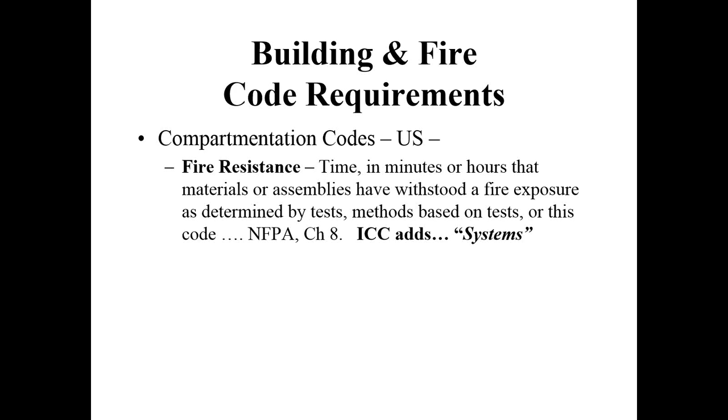Fire resistance is defined in the codes as the time in minutes or hours that materials or assemblies withstood a fire exposure, as determined by tests. Methods are based on tests or the code. When it says by the code, that's referring to Chapter 7 of the International Building Code, and also NFPA 101 as well as the 5000 code, where certain thicknesses of generic materials such as concrete will provide an hourly fire resistance rating based on a long history of testing that was done 100 years ago to determine the thickness of that system. That's used in various locations, especially in old buildings, to identify what the fire resistance rating was.

In an old building where you can't find drawings or specifications, another thing to do is check the back of the existing building code, find the equivalent rating for the type of material that's in it, and then maybe have a fire protection engineer determine what those hourly ratings are. A common function of all of these systems, regardless of the code, is continuity of that fire resistance rating.

Continuity is a concept that flows into the National Building Code of Canada, the Abu Dhabi National Building Code, the NFPA codes, and the I-Codes. Continuity of fire resistance is what creates the need for fire resistance rated doors, dampers, and firestopping in these fire rated assemblies. Openings and penetrations are protected, and the question is, what's the robustness? How strong are these assemblies, and what else can they withstand?

The international codes in certain occupancies have increased the amount of robustness for some of those walls. For instance, in super high-rise buildings, 420 feet and higher, the stairwells and the important shafts have a requirement for blast resistance. Check the International Building Code under that occupancy section, and you'll find where it's required to have blast resistance of those stairwells. Why? To resist some terrorist attack, some explosion that might occur in that building.

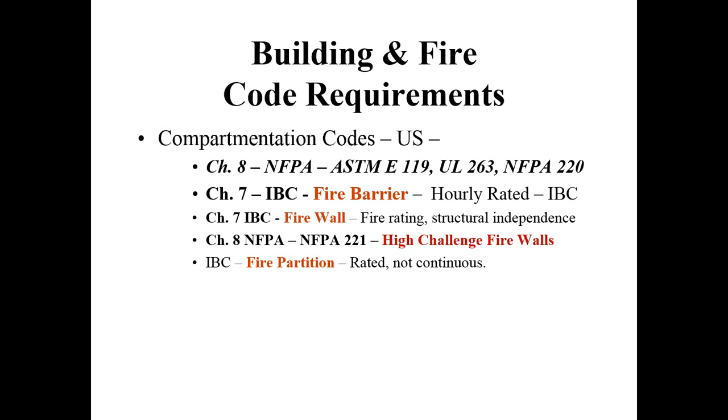That's a true test of compartmentation and structural capabilities of a wall that protects one side of a building from the other. In NFPA, you'll find in NFPA 221 high challenge firewalls. If you go over to the FM world, they'll probably call them maximum foreseeable loss walls. They're meant to protect operations that are critical from a fire that takes place on one side of the wall or the other. Fire partitions are also rated but not continuous.

Then you get into other types of barriers, whether they're fire barriers or smoke barriers. The fire barriers are probably the most common things that you'll find in a building for fire resistance rated construction, used for fire rated separations, mixed occupancies, incidental uses, exit enclosures, shaft enclosures. They're all over the place. And they're used to separate spaces for egress, to protect property from one place to another as required by code. And this is where the, quote, above code construction can take place.

The building code says that if the occupancy is basically the same, you know, I sit in an office building and the people next door to me have the same type of occupancy. They're using the building as an office. Some building owners may choose to be more competitive in their marketplace to put a fire barrier or a smoke barrier in between offices. They could do that.

Does that mean the general contractor doesn't have to build to a specification because they know the code is less than is required? No. The scope of work dictates what is required in a building. The architect and engineers communicate the minimum requirements, code requirements, through the construction documents. But the building owner manager could say every separation between the offices is a 1 hour rated construction that has an air leakage rating for the fire stopping of whatever the number is. They can do that if they want.

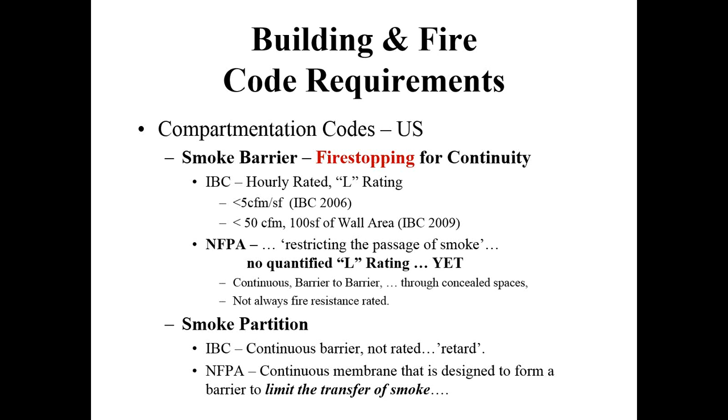Engineering judgment only comes after that contractor has looked at the whole universe to see if there's another system somewhere. How do you do that? It's easy. Call the manufacturers. They know each other's systems because it's a competitive world and they'll find it. Great question. Thank you. So we talked a little bit about requirements, code requirements.

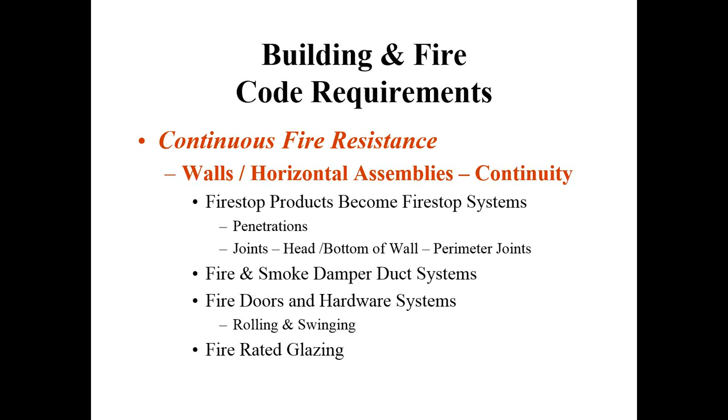There are fire-rated walls that occur all over the place. Exterior walls occur where the building may be too close to the building next door, and fire resistance rating is needed for that exterior wall. It's used in firewalls, fire barriers. These systems, these barriers are used throughout buildings, throughout the world. How's it made continuous? Yeah, firestopping is something that does it, but the other thing that does it is the fire-rated doors, dampers, hardware, glazing, all that kind of thing.

Somebody asked about nuclear power plants earlier on. Many of these products were designed for nuclear power plants. The firestop industry got its start actually in shipbuilding hundreds and thousands of years ago by building compartments that if they fill up with water or fire, they won't spread to another part of the ship and sink it. Nuclear power plants use the same type of protection to protect against radiation, explosions, fire, smoke from moving into critical areas in that nuclear power plant. So many of the firestop products have already been tested for radiation resistance.

Check with the manufacturer to know whether or not the radiation resistance meets the requirements for some of the key critical containment areas. In other parts of the plant, non-containment areas, firestop materials may be able to be used in firestop systems. Check the specifications, check the nuclear power plant requirements. I can't tell you that, I'm not a nuclear power plant designer. Check with those that are really intimate in that.

Blast strength needs to be checked. Chemical resistance needs to be checked with the manufacturers. And biological resistance needs to be checked with the manufacturers and the industrial hygienists as well. Effective compartmentation is important for all kinds of reasons. Smoke control is one reason. Airflow in buildings is another reason. Someday they're going to figure out that it helps with energy efficiency as well by compartmenting a building and controlling where that air goes.

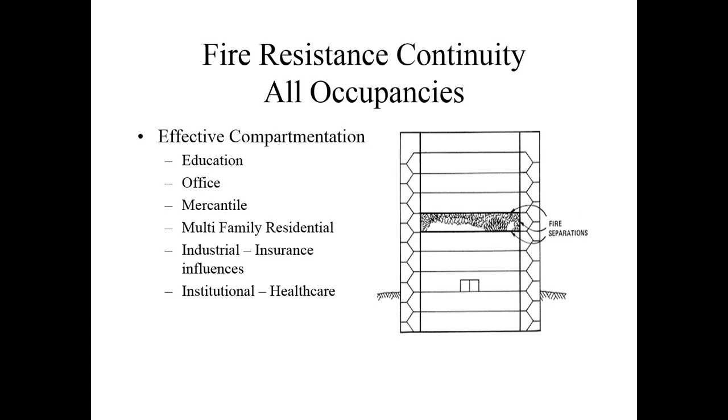But effective compartmentation is used in all kinds of occupancies. We've talked about this before. I'm just going to spend a very quick second on it. Fire resistance rated construction exists in a lot of different types of buildings. We constantly hear at the building code hearings, sprinklers are 99.99999% reliable, therefore buildings are safe. It's been our perspective as FCIA the buildings are safe for, yes, sprinklers, but for a lot of other reasons. The building officials that spend countless hours doing plan review, doing inspections, making sure that the building complies with code, huge.

But there's other reasons why buildings are safe. Alarms and detection systems notify people to get out and do something. The effective compartmentation in buildings keeps people safe. Looking at some statistics very quickly, in North America there's 11,000 tall buildings, 20 stories and higher. 70% of those buildings are in New York, San Francisco, Los Angeles, Chicago, Honolulu, and Toronto. If 70% of those buildings are in there, then the statistic that says that the sprinkler caused the safe building can't be completely true. Does it help? Absolutely. Does it increase the effectiveness of effective compartmentation? Yes. The numbers go up significantly when a compartmented building, a high fire resistance rated construction building, has sprinklers added to it.

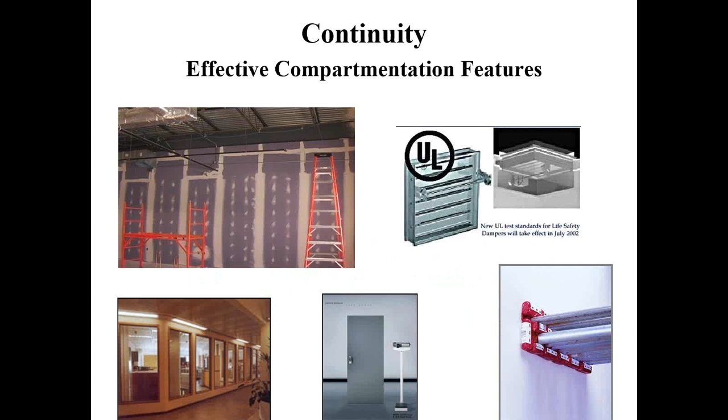The National Institute of Standards and Technology, NIST, mentioned in the World Trade Center 7 collapse, that's the building that fell down even though it didn't get hit by one of the jets, that improved compartmentation in tenant areas to limit the spread of fires could have helped on the structural collapse that took place. So in order to have fire stopping, we've got to have all these things built correctly. The fire-rated floors, the walls, the dampers, the fire stopping, all need to be built correctly.

Tested and listed systems is how we get this done. A professional person who looks at the plans and understands what those plans are. Then that person and the company have to select the appropriate firestop systems to make sure it works. And they've got to get it installed to the tested and listed system. This is where the rubber meets the road in the firestop industry.

The tested and listed systems are where most of the issues show up. For instance, take a look at this UL system right out of the UL directory. Many of the manufacturers publish these directly from the directories, whether it's UL's or FM Approvals, whatever it might be. This system, CAJ 1155, has been tested to both UL 1479 and then the Canadian standard ULC S115.

These two standards are basically the same. Fire resistance is the same, temperature rating is the same, how the hose stream is applied is the same. The only difference between these two is that in certain penetrating items, the pressure in the furnace in the Canadian standard, ULC S115, is higher than the US UL standard. My guess is the metal pipe industry wanted to make it a little harder for the plastic pipe industry to get in, so there's a higher pressure in the furnace.

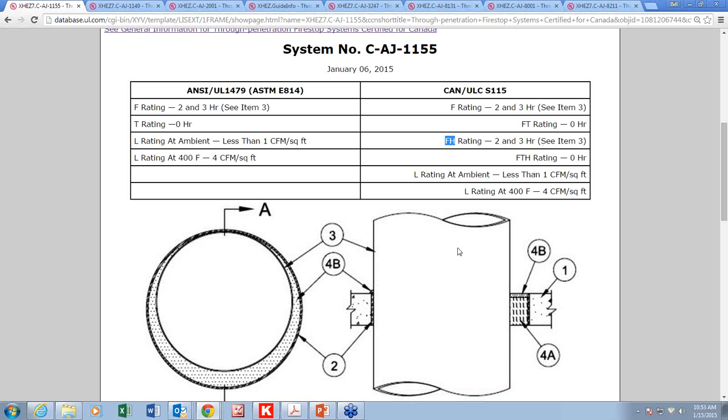Many of the manufacturers have tested both, and they've got systems for both. So as far as performance goes, you're able to find a wide array of systems for when that's required in plastic piping, usually in multifamily residential, around certain types of plastic pipes. Otherwise, everything's the same. Air leakage rating's the same, T rating's the same, F rating's the same. In Canada, the H rating, the hose stream test, is not mandatory all the time. In the U.S., it's mandatory all the time. Very few exceptions for the hose stream test in Canada, very few. It's a very important test to show robustness of those assemblies.

So we show up to the field and there's a plastic sleeve. Guess what? Got to go find another system. Doesn't mean somebody's got to tear out the firestop. It means they've got to find another system that makes sense for that particular application. Penetrating items are all listed in the system, and then the recipe to install the firestop is here as well. Question might come up, is this all I need if I'm the firestop contractor instructing my installers? Is this all I need to get firestopping installed? No, it's not. The manufacturer's installation instructions are critical to getting firestopping installed properly.

The firestop system only tells you what the requirements are and what the limitations are: annular space size, sealant thickness, what type of penetrating item, what type of sleeve it is, what type of floor or wall it is, and then what type of firestop product's in there and how thick. That's all described in the tested listed system. The physical properties, when you can install it, what you need to do to the product once it's in, are not explained in these tested listed systems.

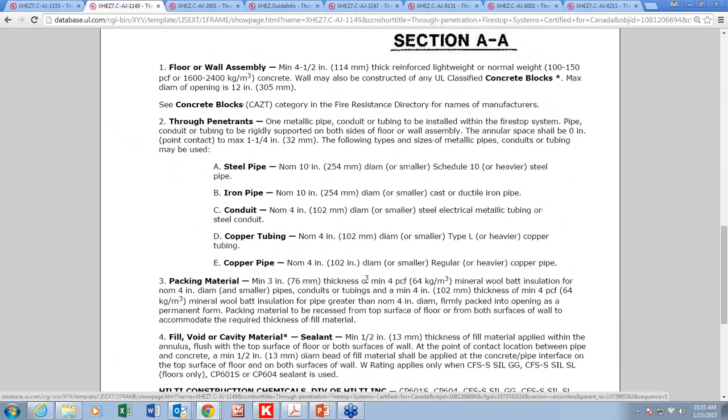Looking at another system, that one just happened to be a Hilti system. This system has no sleeve at all. If you scroll down and take a look, there's no sleeve described whatsoever in here. It just describes a metal pipe through a concrete floor that can be offset with a certain annular space, 4.5-inch thick floor, or any UL classified concrete block. All of this is described in the tested and listed system.

But if you notice, there's no sleeve. Sleeves are used in floors by mechanical and plumbing engineers to prevent water from going from floor to floor. They're everywhere. If you go in any high-rise building, you'll find sleeves in floors to protect those areas. The other thing you'll find typically is that the sleeve extends 2 or 3 inches above the floor. Why? Because that sets up a water dam to keep the water from dumping down to the floor below.

Take a look at this sleeve. It shows the sleeve flush with the floor. I'm only showing it because it's an example of what may not occur in the field. The fire stop contractor knows to look for a tested and listed system that has a sleeve that extends 2 inches, 4 inches above the floor, 10 inches past the wall, whatever it might be, that can be physically installed in that area.

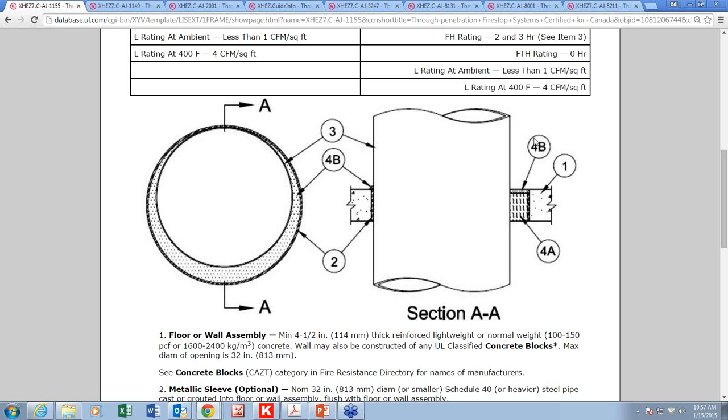If you think about it, if the sleeve was sticking up 4 inches above the floor and the fire stop is supposed to be, as it shows here, that the fire stop material is flush with the top of the sleeve for floors, both ends of the sleeve for walls. So top end of the sleeve, flush with top end of the sleeve. Look at what it says for the sleeve. The sleeve has to be flush with the wall or floor assembly. So if this sleeve is extending 4 inches past the wall or floor, it's a violation. We've got to go find another system.

That's a big problem if the contractor didn't know it and went and installed thousands of these and then has to go find another system that makes sense for it. Many of the manufacturers, you never say all in anything, many of the manufacturers have already tested for those goofy situations that I just mentioned. Are they goofy? No. They're common conditions that happen every day in buildings that are built throughout the world.

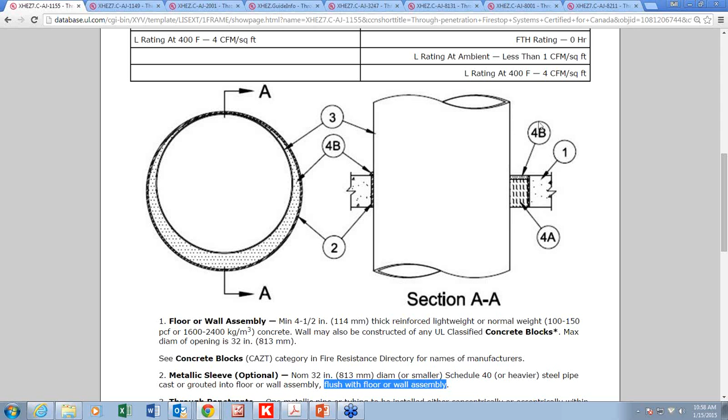Do these sleeves change from metal to plastic? They do, especially in cable type situations, because when pulling cables, you don't want to break the jacketing of the cable on sharp edges of sleeves. Looking at another system, this is the oldest plastic pipe system there is, CAJ 2001. It happens to be a 3M system. Take a look at this. It's got all the different ratings. L rating of 7 at ambient and 1 at 400.

What happens when in a smoke barrier? To count up for the 50 CFM per 100 square feet of wall area, we'd have to use the 7 CFM as the number. Why? Because in the building code it says, I'm sorry, it says ambient and 400 degrees. My apologies. So it says ambient and 400 degrees. So we've got to measure at the worst case, 7 CFM per square foot of opening area.

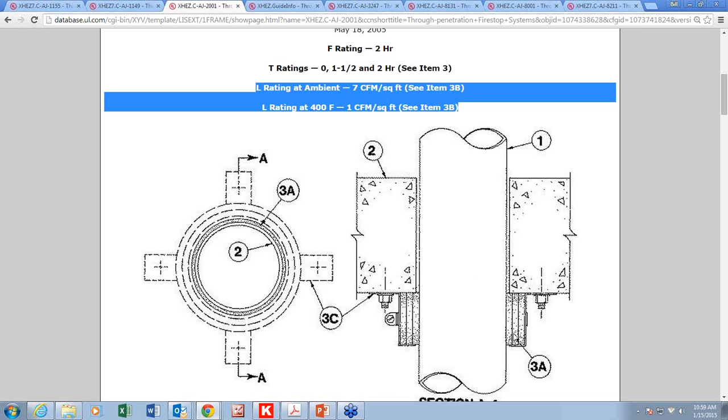And then take a look at this plastic penetrating item. Annular space is engineered to be pretty small. 3 wrap strips are installed. Likely it's a 4-inch plastic pipe. A collar has been installed. The collar is there to hold the intumescent wrap strip, which is supposed to expand at the same rate that the pipe is melting, and crush the pipe, forming an insulating char inside this area that will stay fire resistant for a period of time, 1-2 hours. 2 hours is what's called for here in this assembly.

Note that the collar is bent at 90-degree angles. It'll say it in the description later on that all of these things have to be 90-degree angles. So as an inspector, if you show up and it's at a 45-degree angle, it's a reject. Does that mean that the contractor has to remove it? No. They have to find a way to get that tab to be bent at 90 degrees.

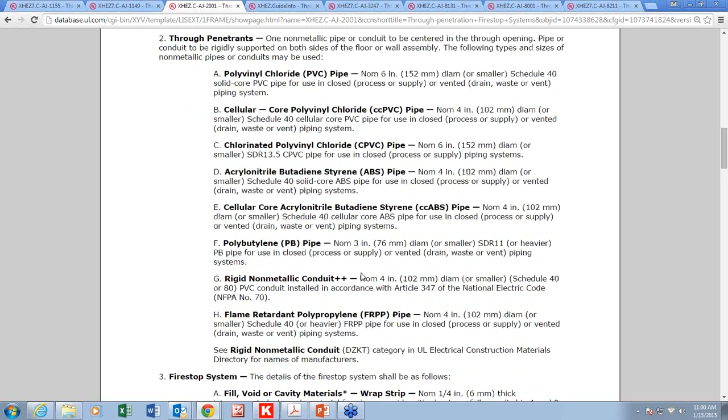Fasteners are fastened into the wall or the floor. In this case, it's concrete floor using steel fasteners. In a gypsum wall, it would be something different. It would be a toggle bolt of some kind with a fender washer on it specified in the system. And then I'm not going to read this system, but take a look how long this thing is. It talks about all the penetrating items. It talks about the fire stop system, and then has a table about what types of materials and how many of them are to be used.

Moving forward, it talks about what material it is, what the manufacturer is, what kind of caulk or putty is there. And then take a look at this. Under Section B, there's some caulk, sealant or putty that's not been shown. That's supposed to be applied to the outer perimeter of the wrap strip at its interface with the wall or the floor surface. Somebody that doesn't read the designs and only looks at the drawings would miss that.

So no, you don't have to be a lawyer to do fire stop systems, nor an engineer, but somebody has to be very clear about the installation instructions that are given to the workforce to get these things installed to the tested and listed systems. Without it, it's craziness.

Question came up. This UL assembly shows the fire stop collar installed at the bottom of the concrete floor instead of the top. It's a critical point. Fire is supposed to heat up these intumescent wrap strips. It's the heat that makes the intumescent wrap strip activate. If the fire stop were located at the top of the floor, this penetrating item would have to melt. That takes 7 to 10 minutes.

And then the fire would have to get hot enough above the floor to activate the intumescent wrap strip and make it crush the pipe. Probably not going to happen. Not probably, it won't happen. Why? Otherwise, we'd have a tested system that shows the fire stop on top. In this type of application, that does not exist. We've not seen that in any of the systems.

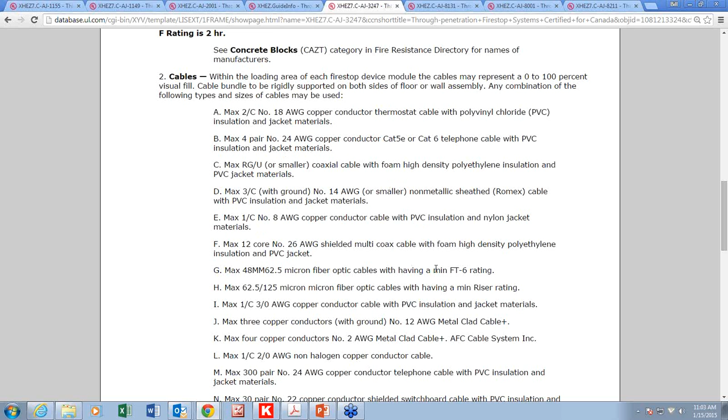Moving on to other types of assemblies. This one is the open path devices. This one happens to be from Specified Technologies with 3 different open path devices ganged together. It looks pretty easy, but again, we'll look at this assembly. It's going to have certain types of cables that are able to penetrate the assembly. These types have to match in the field exactly, such that if there were a copper pipe going through there rather than a cable, it'd be a reject because that's not part of the system.

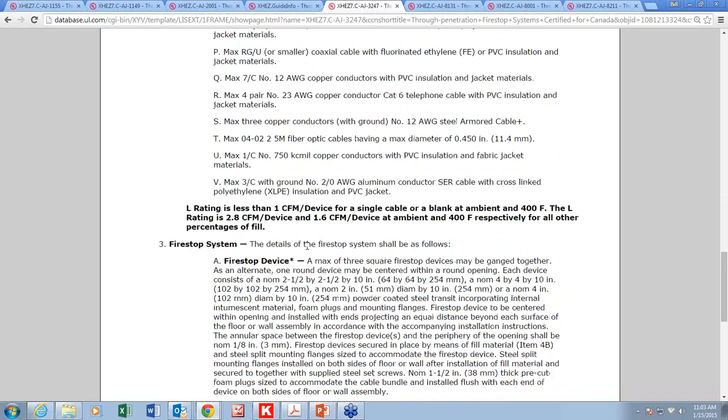Certainly this system, if you look at it, has all kinds of different penetrating items. But take a look. It says how many of each penetrating item can go through. 3 copper conductors, maximum 12 core, maximum 30 pair, maximum 300 pair of cables. These are very specific systems. They spell out the penetrating items, and again, they spell out the device. Manufactured by various companies, whether it's Specified Technologies, Hilti, 3M. They all have their own devices that work for these types of applications.

Then getting down to the Series 8000. This one, again, is one of the older ones with a composite sheet. Somebody might ask me, well, hey, Bill, you just said a couple of minutes ago that the plastic pipe penetrating item showing the system from the top isn't appropriate for that CAJ 2001 system. Yes, I did say that. That's because this system says use the intumescent wrap strip from the bottom. Now you're going to say, hey, Bill, you've got the intumescent composite sheet sitting at the top of the floor and anchored to it.

But take a look at a difference here. From the fire performance perspective in the test laboratory, the intumescent composite sheet has been applied to the top of the floor, but the firestop wrap strip is actually located by the penetrating items, such that they're exposed to the fire very quickly and very closely, directly as well. There's intumescent wrap strips that are centered. If it's a 2-inch wrap strip, it's centered such that there's a little under an inch above and a little under an inch below the composite sheet, so that when the fire comes up into this annular space, it activates the wrap strip to crush the insulation, to provide fire resistance and smoke resistant properties to these cables as well.

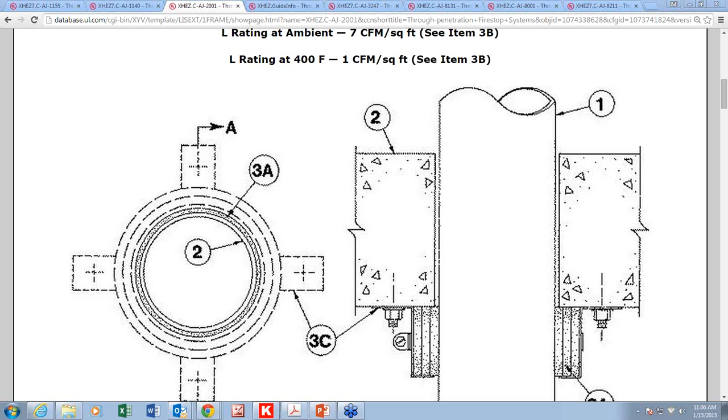Here's one that says, the largest problem with installation of these, especially maintaining these systems, is when IT companies come in later and use the existing. Who's responsible? Great question. That's addressing the CAJ 8001 type assembly where there's multiple penetrating items. Could even be a single penetrating item. Let's say it's this guy, the CAJ 1149, and the cable guy said, look at this annular space. It's open. I'm just going to run my cables right through that open hole here. The violation takes place. The system isn't there. Who's responsible? Your submittal, if you're a firestop contractor, showed a penetrating item without it.

If you document your systems, and many contractors document their systems with pictures. They send their mechanics out with digital cameras, digital phones, and they take a picture of every firestop system. Some of them label them with the firestop system number and catalog them for their own liability for that particular reason. They, as contractors, can also offer that as a value add to the building owner and manager afterwards. Say, look, fellas, I took pictures of everything you have here.

Whatever deal they work out with the building owner or manager, whether they pay for it or not, the contractor can then say, I'd like to set up a maintenance program with you and maintain these assemblies so that when the cable guy, the oxygen piping person, the med gas people, whoever goes through those walls, they can fix them. That's a way to control that, is document it.

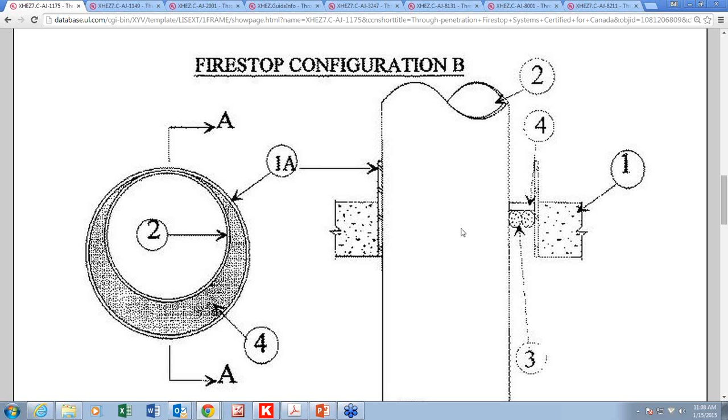1175 shows the Firestop sealant at various places. This one shows the Firestop sealant down at the bottom of the floor. It also shows it, in this case, though, flush with the floor. I can tell you that there's a lot of other systems that show the Firestop sealant installed at the top of the sleeve rather than at the plane of the floor. So what you do, you go find another system. That's how you get that done.

So let's go back to the tested and listed assemblies here and do the slideshow and talk about it. I'm not going to spend a lot of time on testing. We're an hour into this. The testing is what sets the suitability for use statement of the Firestop product and specific application. Yes, testing is important, but what's really, really, really important is knowing how to select the systems on the left and then look at the penetration on the right and have that system be installed right. That's the contractor's issue. Okay, now let's go to the next step.

What's the inspector's issue? The inspector's issue is they come to the field and see that there's Firestop materials installed around all these penetrating items. The inspector's job is to then take what submittal has been provided by the Firestop contractor, electrical, mechanical, plumbing contractor, through the communication channels to the building owner, manager, and or architect, who is tasked with hiring the special inspector, or in buildings where special inspection isn't done, those submittals are then given to the building code official, who has to do his or her inspection. And I'll show you in the code where it talks about that inspection here shortly.

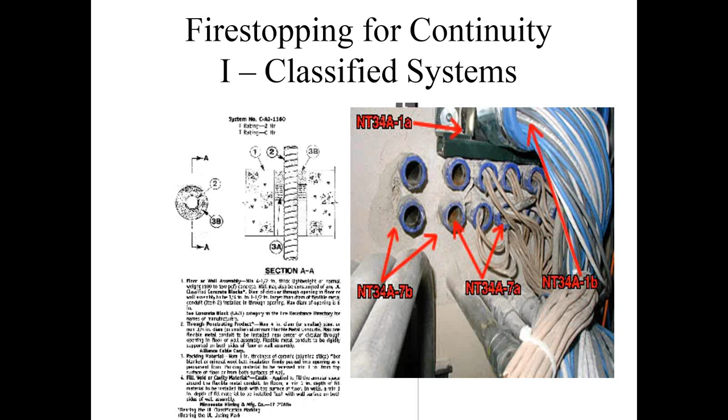Those systems are used to judge the fire stops that have been installed. Without this system, they can't judge whether the fire stop has been installed properly. That's what all these test standards do. The ASTM E814, UL 1479, FM 4990, the ULC S115. The test method results in the system. The system is what guides us. The products are used by contractors to get installed to the various areas of the building that meet the physical requirements of that building as well, and meet the physical requirements of the penetrating items.

For instance, this picture on the right shows a Firestop mortar product. Mortar is a cementitious-based product. If you were to ask the Copper Development Association, is concrete and copper compatible, they'll say, no, there's a galvanic reaction between the copper and the cement and limes that are in the concrete mix. Therefore, they're not compatible, and we don't recommend those two things touching. Therefore, there might be a Firestop system that shows fire stopping being applied around copper, but the physical properties of the copper say don't use cementitious-based products.

There's also a memo out by the Copper Development Association that says be careful about latex acrylic products used in and around copper penetrating items. That's also critical. That means that the Firestop manufacturer, and all of them have done this, need to have some kind of suitability for use statement to the contractor that says that they believe their products won't affect that copper. Copper Development Association still has that on their website to check acrylics and copper. Firestop materials, many of them are latex-based. That means it's acrylic. So therefore, check with the Copper Development Association, check with your manufacturer partner to make sure that their products are compatible with copper and any of the other products that are out there.

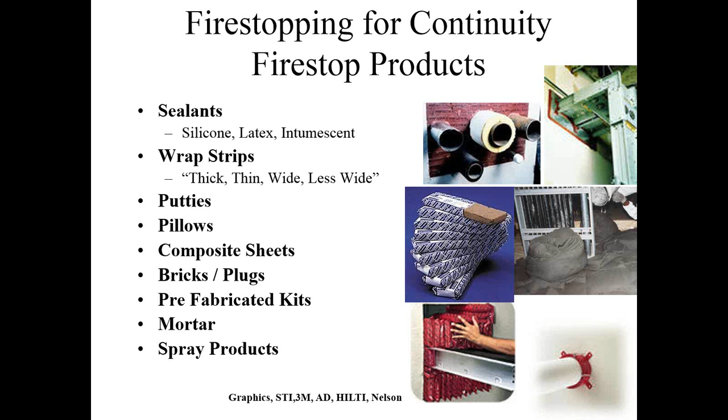If you want to study it extensively, the new Firestop Containment Worker Manual and then the new Chapter 3 of the FCIA Firestop Manual of Practice, those two documents have about 600 pages of this. Now, mind you, some of that 600 pages is tested and listed systems, but we did a huge, extensive update in 2014. Read about it, learn about the products, and we went to all the various places to find information generically so that you can cover the whole industry in one place.

What about fire dampers? Fire dampers are tested to a different standard, UL 555 and 555S. They've got to be installed to the manufacturer's instructions as well. Fire stops can be used around fire dampers as long as the tested and listed system allows it and as long as the AHJ allows it. So again, match the products to the physical properties of the building. Is there germ resistance required, chemical resistance, radiation, biological resistance required, and then match it up to the products that are there. System selection and systems analysis is really what makes this industry tick.

The Firestop contractor has to choose the right system for the right application. The Firestop Special Inspection Agency and the inspector working for them has to analyze those systems and make sure the right ones are used. The AHJ isn't paid to be a special inspector, and they're not paid to be the contractor's quality control department. The building official's responsibility is to make sure that the fire stopping's there, yes, but not to be the quality control agent. That's why the building owner hires a general contractor and all the subcontractors. That's their job.

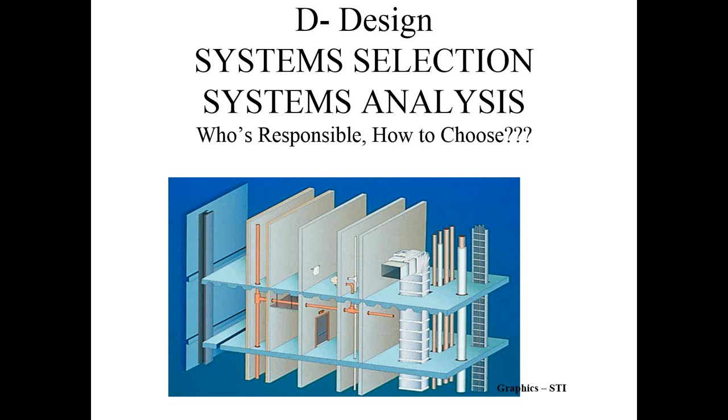Does that mean that the AHJ won't ask the contractor to cut open a couple of openings, penetrations, and see if the fire stop was installed to the system? Not at all. Does it mean that they're not going to do an extensive inspection? Don't know. Depends on the jurisdiction. Depends on whether the building owner or manager maybe even paid a little extra to the community to have a super strong inspection done. So systems analysis, system selection, that's what it's about.

Special inspectors got to know all of these things, the F rating, the T rating, the hose stream test. That hose stream test is there to provide shock, not necessarily waterproofing. It's a means to apply a force to that assembly to make sure it's got a robustness and stays in place when the ceiling tiles are falling, the light fixtures are falling, and hitting that fire resistance rated assembly. If any water gets through the unexposed side, it's a failure.

The various directories, UL, FM, Intertek, they've all got the systems. We spent a little bit of time talking about them, whether it's a head-of-wall system or a penetrating item system. Those systems are mandatory to know, and mandatory to be able to judge whether the fire stop contractor got it right, or if they chose the right system, and accept or reject that application. The other critical thing to know on these systems is,

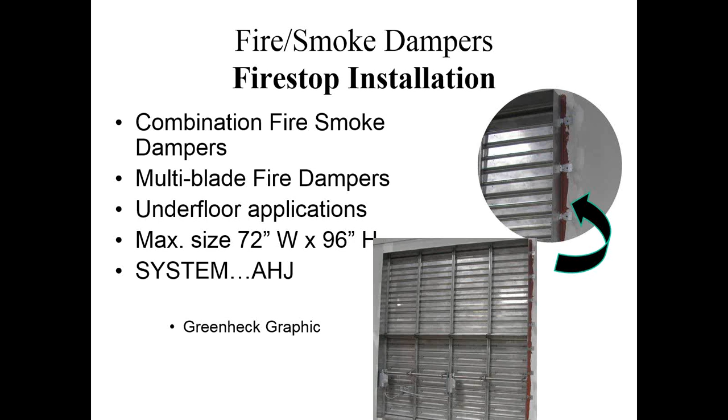The fire stopping that's applied on the side of this has been proven through testing that it may work. Not may, does work. The only time we know it works is when there's a tested and listed system for that damper assembly that allows the use of fire stopping on it. Otherwise, both sides of the wall don't get any fire stopping, but get these angles that are welded at the seam, or welded at the corners, so that it's a continuous angle all the way around the fire damper. The only time that fire stopping is allowed is when testing allows it and when the AHJ allows it to. Great question. Thank you very much for asking it.

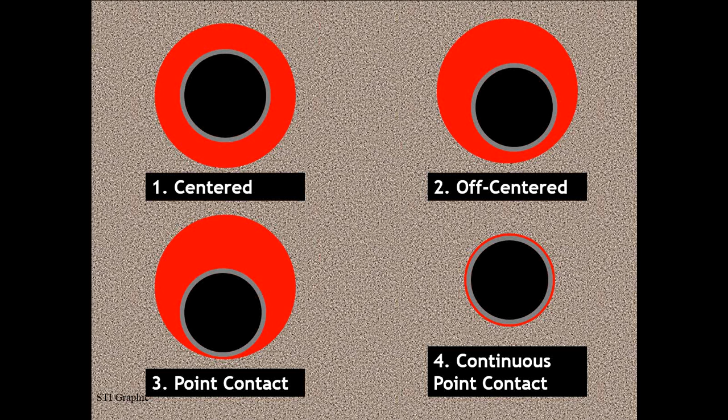Back to the systems. Here's the key questions that the professionals need to know. What's the wall or floor? What's the penetrating item? Does it have insulation on it? What kind of insulation? Is it a plastic pipe? What kind of plastic pipe? And then what are the rated fire stop systems used to make that work? Are the penetrating items installed into the walls or floors through them to create the opening? Are they off-centered, in the middle, off to the side, continuously touching? How are they working? And then will the system explain that?

Down to engineering judgments. Here's what we talked about. Protocol is, if you can't find a system from the manufacturer you submitted, find another system from the same manufacturer first, go to a different manufacturer second if no system exists in either case. And this different manufacturer could be any of the manufacturers. Again, this is where you really need to rely on the technical departments at the manufacturers of the fire stop products. They know each other's systems like there's no tomorrow. Why? Because that's their competitive advantage. Have the testing that's more competitive, that keeps the contractor faster, better, cheaper. All of these guys know each other's products and they know their systems very well.

Ask the manufacturer, what other system should I use? Make a phone call to the other manufacturer if you need it. If you can't find a system, then we go to an engineering judgment, or as FM calls it in the FM 4991 program, an equivalent fire resistance rated assembly.

The International Firestop Council, which is the Manufacturers Association of Firestop Manufacturers, has this website, firestop.org, or I'm going to post it this afternoon, the IFC guidelines for evaluating engineering judgments. And these are guidelines. And the guidelines say that construction industry professionals, etc., need to evaluate these guidelines for evaluating and using such judgments. So the industry association has said others need to make the decision whether these are suitable or not. Building officials, contractors, and others.

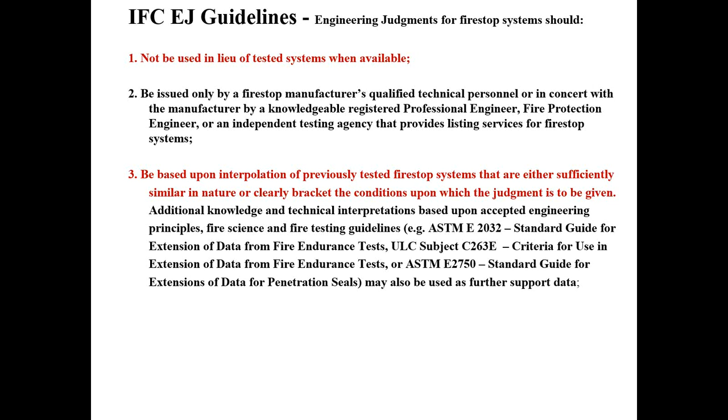So I'm not going to go through these guidelines one by one. Be aware that I'll put it up on FCIA.org on the home page in the hot news this afternoon. But look at all these requirements that are in the guidelines for evaluating engineering judgments. This is several pages. I'm going through slide after slide of what the engineering judgments are. These are not to be taken for granted.

And secondly, they do occur on buildings. It's not like every manufacturer, although they've tested 9,000, 10,000 systems depending on where you are, which laboratory you look at, there's still cases where engineering judgments come up.

Buildings shouldn't have a ratio of 90% engineering judgments and 10% systems. It should be the other way around, and I can't give you a specific number of what that number is because I've not done the research. But by and large, it should be tons of tested and listed systems and not as many engineering judgments.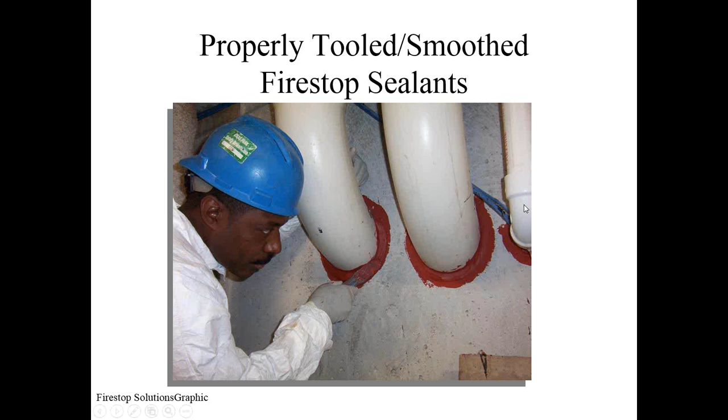Here's a variance that was pointed out earlier. This blue cable that's going through the plastic pipe penetration. That's exactly what the person asked me earlier on in this presentation. What happens afterwards? Well, there are some systems that may exist allowing internet cables, Cat5 cables, going through the same penetration, same opening as a plastic pipe. Find the system that matches it.

Here's the sleeve thing. Another question to ask about is what's the type of sleeve? We talked about Schedule 40 in those systems I showed. These aren't Schedule 40. These are 28 gauge sheet metal with seams. So this has been applied to the wall after the building was built and after these service penetrations were made for the service items that are carrying services into the building.

So the manufacturer may or may not have a system for this. It looks like the sleeve extends like 5-6 inches past the wall. Does that mean that someone has to get an engineering judgment? No, there might be a system for that.

But a question just came in: what happens if there is no system for it? Does a manufacturer prepare it, or does it require a stamp by a registered fire protection engineer? That's a great question. In the last International Building Code cycle, that resulted in the 2015 Building Code, there was a debate about this. And the debate was, should engineering judgments be stamped by fire protection engineers, or should they be verified by the testing laboratory?

If you think about it, engineering judgments are self-certifications by manufacturers of those products. Is that something that should take place in the industry a lot? Likely not. This is the fire and life safety industry. Should it take place at all? It has to take place because there just aren't systems for every particular application.

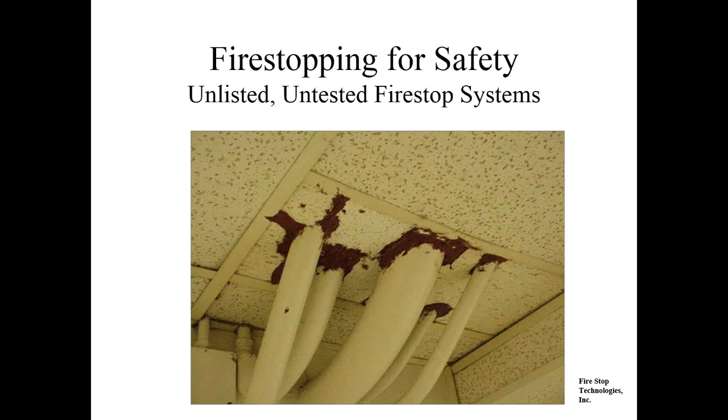On to things that exist that are probably crazy. Yes, this one looks crazy, but what if that were a rated floor ceiling assembly and that ceiling membrane was actually part of the fire-rated assembly? Then we'd have to find a system that allows fire stopping around penetrating items going through ceiling tile. Drywall compound is not a fire stop. Obviously, it doesn't hold up to a fire condition, hasn't been tested to ASTM E814. Inspectors need to look on top of things to make sure that they've inspected appropriately.

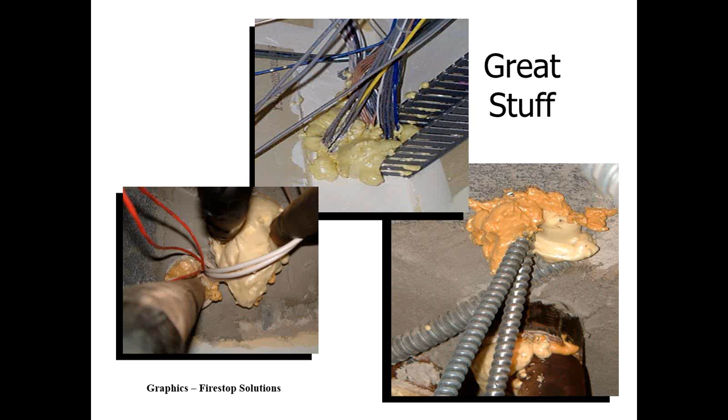Foams, unless that foam has passed the ASTM E814 UL 1479 test for a fire stop and doesn't say modified on the can, modified isn't something that's in the International Building Code, then it shouldn't be used. We just talked about fire dampers. Fire dampers can have fire stops in them as long as they've been tested and listed for that particular use, and the AHJ allows it.

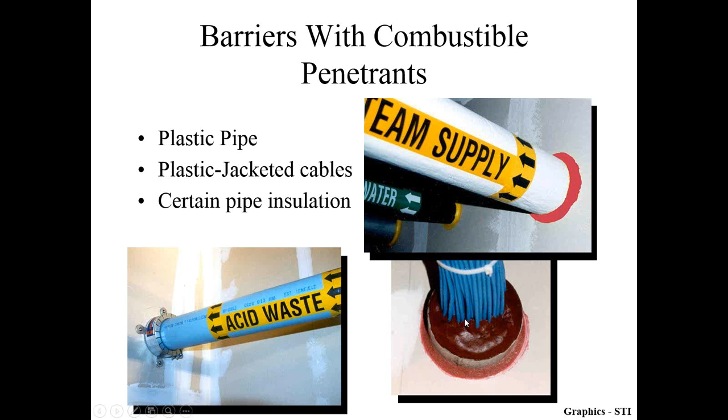Other key things on fire stop systems: in the cable penetrations, inside the language it'll say fill around the interstices of these cables. That's huge to remember. Interstices means open up every cable and fire stop in between. Joints are another thing. Joints are where breaches occur between assemblies. The breaches are there to separate the assemblies. The joint system is used to provide a bridge, if you will, fire resistance rated to prevent fire and smoke from moving through that assembly.

In the International Building Code, sooner or later somebody's going to put in a code change proposal that defines this better. The joint, if you look at the code, it talks about intersection, it talks about joining, etc. That's really the joint system that ties the two together. What we're really looking at is a breach between assemblies for various reasons, to separate two dissimilar materials, to provide movement in a building, etc. Those are all different things, and something the International Building Code really needs to deal with, because the definition of a joint currently defines the treatment more than it defines the opening or the breach.

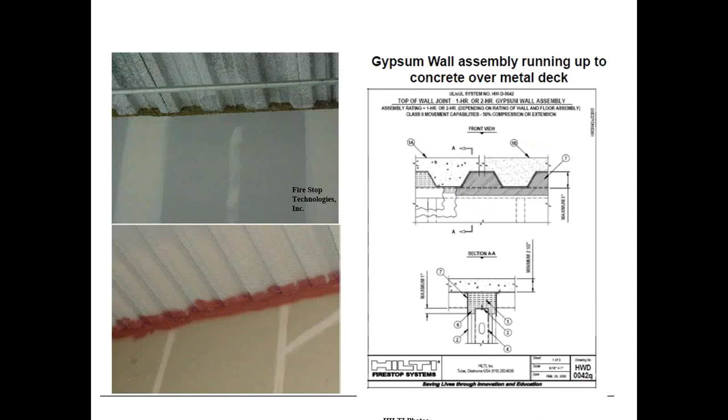Joint systems are subjected to movement. Class 1, 2, and 3, those all show up on the fire resistance rated assembly. Joints occur at the head of wall assembly, where walls come together, floors come together, with fireproofing, without fireproofing, with penetrating items, and without penetrating items. Penetrating items, you can see as they're going through the wall, somebody put some BX cables as the wall or floor goes through it. The fire-rated assemblies are going to vary.

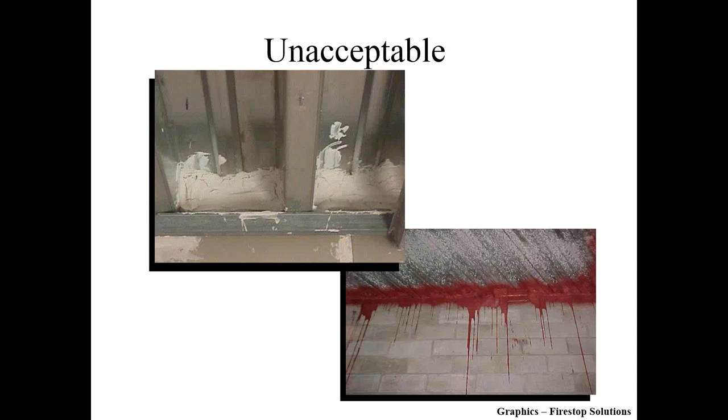As you can see, this is a beam holding up a floor assembly. So the drywall or concrete block is probably underneath this beam. And then there's spray fireproofing, spray fire-resistant materials everywhere. Penetrations come where bar joists penetrate assemblies as well. Those need to be treated. But again, it's got to be done with the right stuff, installed by people that understand what they're doing.

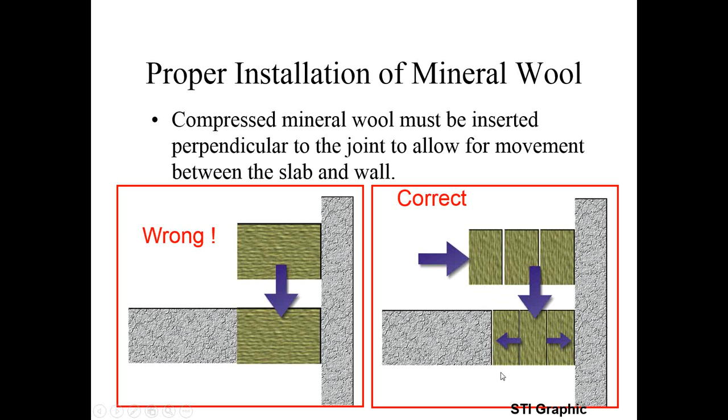In perimeter fire containment, these systems are meant to stop fire spread from the interior of the building from floor to floor at the perimeter curtain wall assembly of the building. There's a fire test that's been done that judges fire attack from the outside of that joint and the inside of the joint. But the key thing to remember is this ASTM E2307 system only judges the interior fire spread. It doesn't judge the leapfrog. That standard has not been developed yet. However, what it does is provide the continuity of the fire resistance rated floor all the way out to the outside edge of the building at that curtain wall assembly.

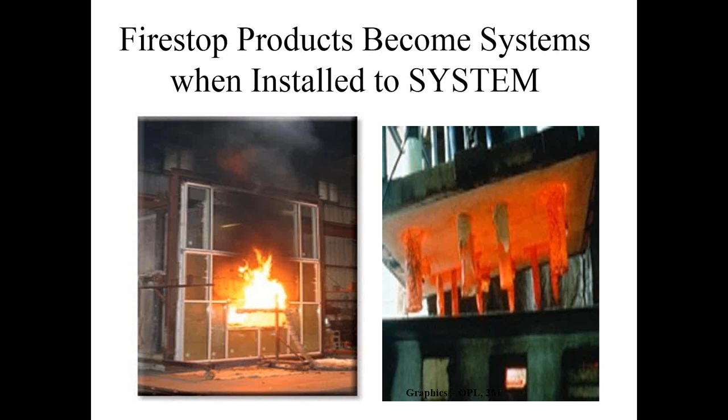Unbelievable. A perimeter fire containment system coupled with a non-combustible insulation that may have sandwiched combustible high R value insulation might have prevented that. So the key thing is systems. How do we choose these systems? Systems have got to be done by professionals, people that really understand what they're doing.

It's not like the circus. This is what I call the Cirque du Soleil of fire stopping on the right-hand side. Currently, the way fire stopping is done is he or she who pokes the hole fills it, or a fire stop contractor does it, or a combination of the two. We see the share of the fire stop contractor being more and more as building owners and managers figure out that they're not getting the value that they paid for.

The fire stop contractors understand systems. The trade contractors understand their trade. It's really hard for a worker to understand two trades, let alone understand one trade, let alone multiples.

A couple of questions came in. First one is when we will have a system in Canada for the edge of slab. The edge of slab systems in Canada, the specifiers and the building officials have been accepting the ASTM E2307 standard as the right standard for curtain wall perimeter fire containment systems. Testing is done at UL. It's accepted throughout Canada from what we've seen.

Second question that came in about joints is that some building contractors don't like to fire stop static joints. They claim they can use grout to close the gap since there's no movement requirement. Is that correct? That's a great question about what can be used as a product for handling joints at the bottom of the wall in non-movement rated joints.

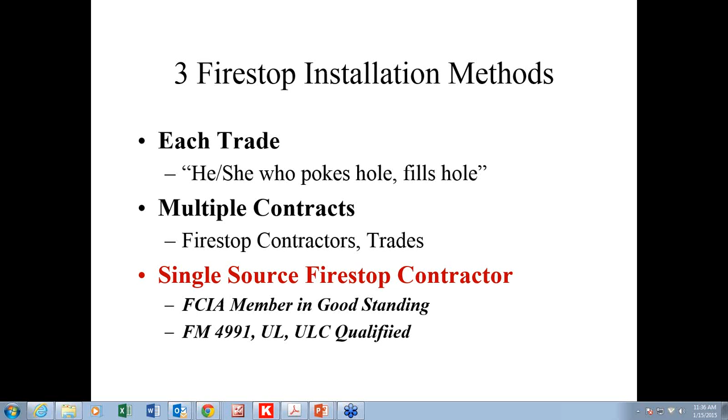Second question is, how does ASTM E2307 stand up against other tests with pressures? That's a good question, and I'm going to save that for the next webinar. Let's get into our next topic about contractor qualifications. That perimeter fire containment assembly we're going to use as a webinar for a later date, so thanks for asking that question. Fire stopping ratings, F, T, H, L, and W, these are all complex things.

We just spent an hour and 15 minutes talking about systems and how complex they are. Yet the fire stop products can be bought at a hardware store. They can be bought at a specialty distributor that takes care in how they distribute materials and asks the questions about systems. They can be sold to about anybody.

The manufacturers, and I got to take my hat off to all our manufacturer member companies, Specified Technologies, 3M, Rectorseal, Hilti. All of these companies are very professional, and they've invested millions of dollars training individuals in the field with a 1 hour program, half-hour program, half-day program, having people to their headquarter locations to look at their testing laboratories, providing multiple day education programs that they charge for, or sometimes they don't. Regardless, they are training people like crazy, and we really respect what they're doing with that.

The FCIA is doing the same thing through our manual of practice, through our Firestop Containment Education Program, Firestop Containment Worker Education Program. We've got 22 PowerPoint presentations, 22 quizzes with 50 questions each to 20 questions each. We've got countless hours of video for step-by-step installation for the Firestop Containment Worker or the Inspector Worker. Tons of stuff going on there.

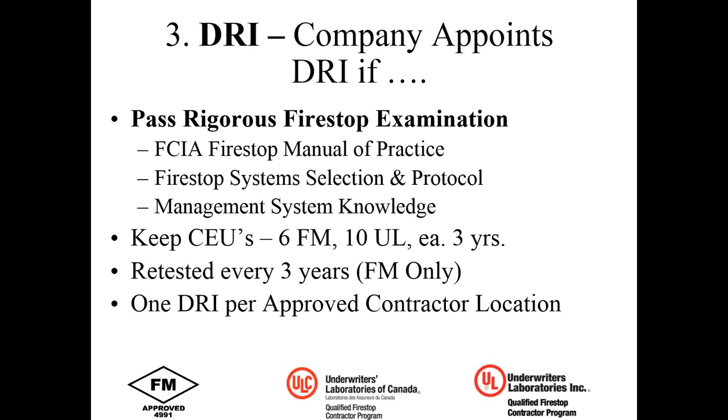And then the individuals, the DRIs, the designated responsible individual, has to keep learning units that turn into CEUs. They have to keep 48 of those learning units every 3 years. You can get them by attending these webinars, attending FCIA conferences as a way to get those along the way. They have to keep that, again, for continued satisfactory performance.

And the whole idea of this management system concept is have a program that quantifiably verifies that the company's got the procedures in place to get fire stopping installed properly. The FM and UL people go to a job site. They may cut a couple of holes. They don't cut the holes. They have the contractor cut the holes, and then judge if the fire stop's been installed properly. It's not an ASTM E2174 2393 program. It's a check of the management system.

What's the management system? Here's the management system. How do the companies train their employees? How do they select systems? How do they communicate those systems to the field? How do they control materials and make sure that the product is transported at the temperatures that the manufacturer recommends? How do they control those materials so that only good materials are used?

What's the installation protocol? Does the field crew have the protocol in their head that says if it's not a system, it doesn't meet the requirements, if it exceeds the annular space, that we're going to go look for another system? Does the contractor label every one of their penetrating items? And if they do, how do they label them? How do they control the labels? Do they number them? Are they barcodes? Are they handwritten? And what's the procedure for them? How do they keep records about these fire stop systems? The FM and UL programs both require keeping records for 7 years.

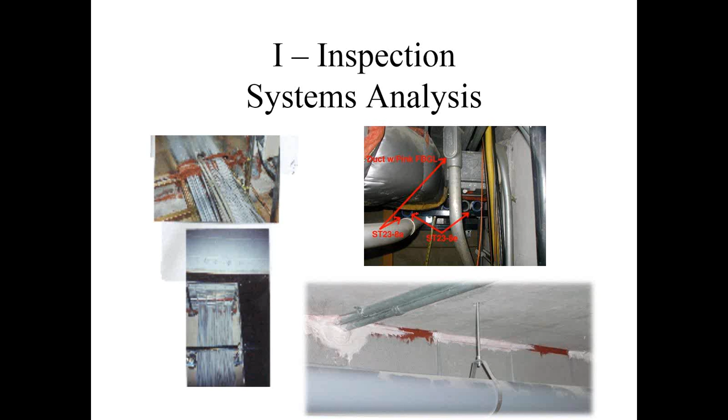Now, what about inspection? Inspection is a very important piece of the DIIM. Why? Because inspection, installation, and maintenance all go around in a circle. The installation's got to be done right. The inspection verifies it's been done right. The maintenance makes sure that the operation of the building continues without interruption because the fire resistance rated construction works.

The sprinkler guys have done a good job of this. The alarm people have done a great job of this. Those companies and those industries have annual inspections that the building owner manager has in their culture that it takes place every year. Fire resistance seems to be a forgotten animal. Why? We don't know. I think it's education that needs to be done by our industry to the AHJs, to the kids in 8th grade, high school, college, to the building owners and managers, and to the occupants.

There's a question that came in about qualifying a non-UL/FM contractor as an AHJ.

What about inspection, though? The International Building Code has a requirement for ASTM E2174 and ASTM E2393 inspection of firestopping. The standard has very few requirements for the inspector, very minimal requirements for the inspection agency, but does tell you how many firestops have to be tested. Currently, we're debating at ASTM how do you test, how do you cut, how many times do you cut in the same penetrating item, and then what is acceptable as well. It's a great standard. There's great reasons for all of these things to exist.

What are the inspection options? Self-inspection is done. Under the FM and UL program, each contractor that is FM approved, UL, ULC qualified, has to have some kind of a verification that they've got firestop systems installed correctly. They don't look at 2% or 10%, cut 2% of the installed firestops or observe 10%. But they do cut holes in the joints and in the penetrations as part of their management system.

What about the manufacturers? Do they do inspection? No, they don't. They were right behind us as we were the proponent for this ASTM E2174 inspection. They don't want to be inspecting because they see the conflict that comes with the manufacturer who's trying to sell products to the contractor and telling them they really messed up and they have to take out everything and start over again. That's a really tough pickle for that manufacturer to be in.

Some manufacturer model programs have that. The roofing industry does. They won't give a warranty until the roof has been done right, and they'll reject and make the contractor do more work. This industry is not there. And that's okay. That's the model that's in the industry, evidently. ASTM E2174 and E2393 inspection provide independent third-party inspection, can be either destructive or non-destructive, at a specified frequency.

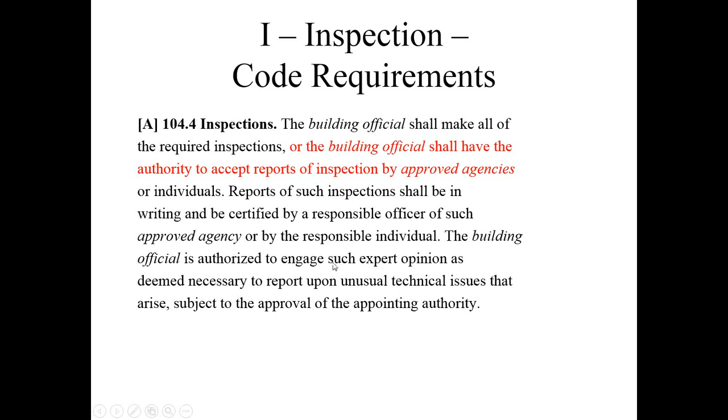In 110.3, it talks about upon notification, the building official can make inspections as set forth in 110.3.1 through 110.3.10. In 110.3.6, it talks about firestopping. It says that the firestopping shall not be concealed from view until inspected and approved. That 'approved' is another word that's important to remember as well. In 110, it also talks about the building official being authorized to accept reports, provided the agency satisfies the requirements for qualifications and reliability.

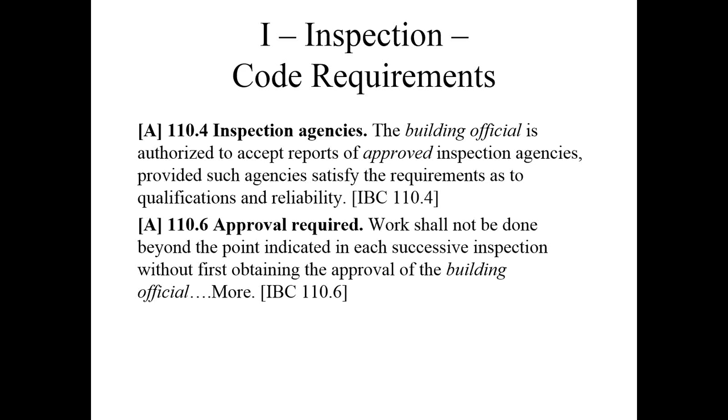And then there's approval required. You, meaning the general contractor, can't move on until the inspection has been done. Now this is the academic world and the code world. We know that there's contractors that go blowing past inspections and get things done, close them up before the inspector's been there. That's really against the law because the building code's the law. It's the minimum requirement.

Let's look at some definitions. Definitions are very important. This is out of Chapter 2 of the International Building Code. The approved agency is the established, recognized agency regularly engaged in conducting tests or furnishing inspection services when the agency's been approved. So look at this, established, recognized agency. Secondly, approved is acceptable to the building official or authority having jurisdiction.

That's where we go back to the approval of engineering judgments, or the process, actually. The building official can approve it, or they can say, we don't want any engineering judgments. That's not something we're going to accept. That's totally up to them. Our industry may or may not agree with it, but that's the power that the building official has. It's given by the code.

There's also a definition for a special inspector. The special inspector is the qualified person employed or retained by the approved agency and approved by the building official as having competency necessary to inspect a particular type of construction requiring special inspection.

So approved agency and the special inspector are two different entities that the building official has to approve. These are in Chapter 1, Chapter 2 things. Now let's go to Chapter 17, which is the International Building Code's section on special inspections. These are items that have been identified by the Building Code Development Organization as important to have special inspections, typically structural, items that affect structural issues.

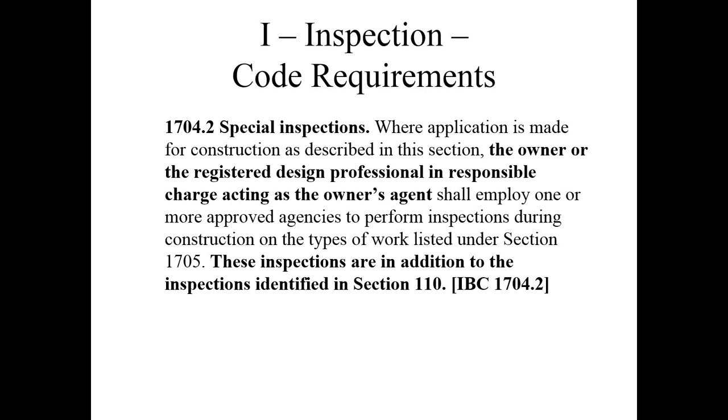The design professional has the license that's held out as protecting public health, safety, and welfare, along with the building official who takes the same oath. But the liability lies at the building owner, manager, architect, and all those construction people that have been involved along the way. Special inspector qualifications are laid out. I'm not going to read this whole thing in 1704.2.1, but it talks about competency, experience, and training, on and on.

Chapter 17 talks about fire resistance rated penetrations and joints. Fire stopping special inspection is required in a high-rise building. The high-rise building is defined as a building 75 feet and higher above lowest fire department access. And then the two standards are called out.

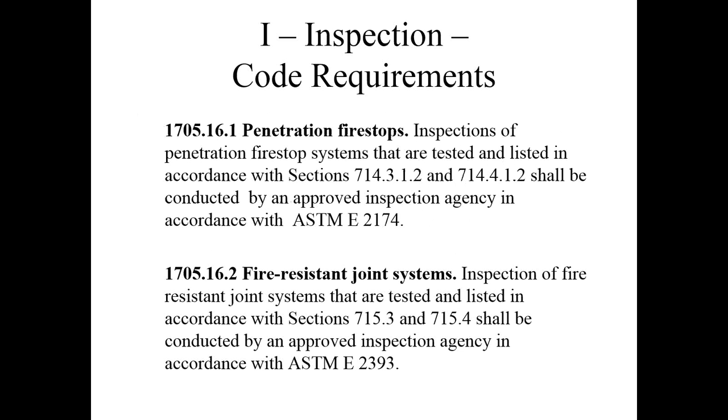It's also required in special occupancies in Table 1604.5, which calls out buildings, education occupancies with 200 or more people, assembly occupancies with a certain threshold number of people. I think it's 500. Don't hold me to that number. I'd have to go back to the exact code section to find it, which we certainly can do. However, we're running out of time, so I'm not going to.

So the special inspections require ASTM E2174 and E2393. Independent of, divested from, not a competitor of, are all part of E2393 and E2174. E2174 says 2 years experience, accredited by the AHJ, meet ASTM E699. There's also another way: the approved agency, which needs to be hired by the registered design professional and building owner, can be accredited as well through International Accreditation Service AC291.

It's a company accreditation. It says that the firestop special inspection agency company has to have an individual that passes the UL or FM firestop exam, regardless of whether they're an engineer or registered design professional or not, and at least 1 year quality assurance. This has to be specified by the specifier because it's not required by code. The building official could certainly say, in order to be a special inspection agency that I'm going to approve, I want to see IAS AC291. And then individual certifications can be there as well.

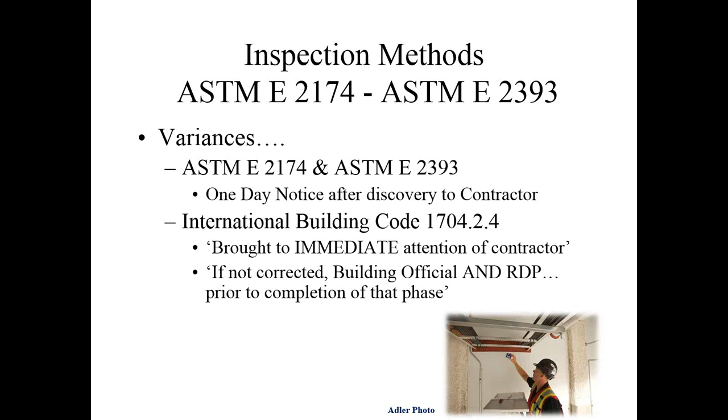Or the process could be set up that it's verbal, followed up with in writing. And then again, in both methods, if there's a variance, the inspection stops and they start all over again. The reports are submitted quickly. There's a report requirement in Chapter 17, and it's a critical element to make sure that the final report has all the inspection deviations, et cetera. These special inspections are quite good.

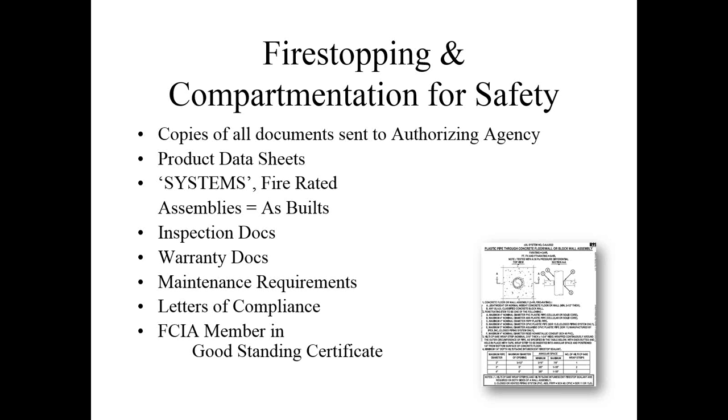In addition to the special inspections, all the various documents should be given to the building owner and manager so they can take the building and maintain it through its life cycle. Because we know that after the building is built, things happen.

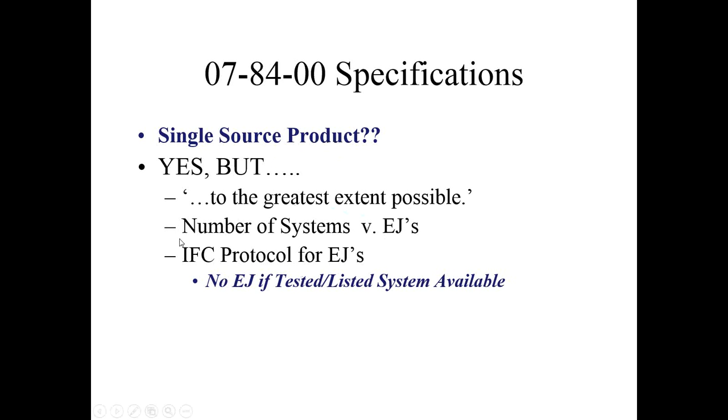What needs to go in the specifications? The accredited inspection agencies, IAS AC291, that somebody passed the UL or FM exam. Specify the FM and UL Firestop Contractor programs. Specify the various test standards. Remember that in the specification include these words: install a single source product to the greatest extent possible. As soon as those words are there, that allows for an engineering judgment. It allows for switching to another tested system.

The F, T, L, and W ratings have got to be specified, and then the building's got to be maintained. NFPA 101, 2012, talks about continuous maintenance of fire resistance rated construction. The code's very clear, whether it's NFPA 101 or the International Fire Code. Both of them say that the fire resistance rated construction shall be maintained, and then look at this, properly repaired, restored, replaced when damaged, altered, breached, or penetrated. It doesn't say do it once a year. It says restore it when damaged. That means as you go.

So the building owner manager really should have some method that has the building management, the building engineer, monitoring what goes on in the building. How can that happen? A barrier management system, a barrier permit. If there's a service item being run in a building, before they pop open a ceiling tile, they meaning the subcontractor or even the in-house staff, they have to get a permit from the building engineer. That building engineer would have a checklist on that permit system that says you're penetrating fire resistance rated walls. We're going to have the Firestop contractor come in and fix those after you're done, or incorporate it as part of the project for that electrical contractor, communications contractor, or whatever. Very, very important.

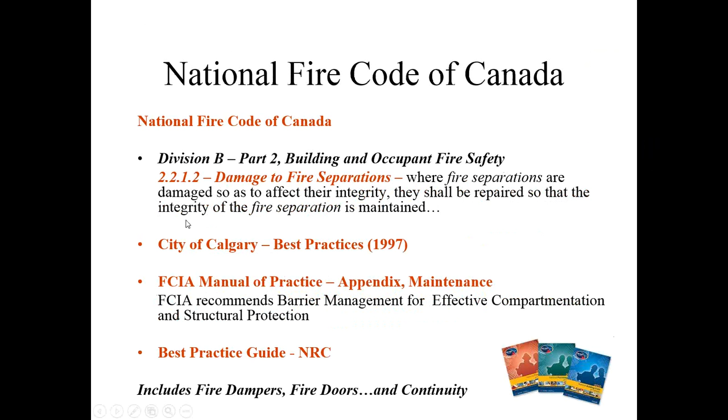So whether you're in Canada, Canada says the same thing: shall be repaired so that the integrity of the fire separation is maintained. Important stuff. I want to get back to the questions, though.

There have been several questions asked along the way regarding the AHJ and other things. I'm going to make my little screen bigger, and then I've also got questions from the attendees. The official presentation part's done, we've gotten our 2 hours in. Now it's time for the questions and answers. Give me a second here to take a look at one of these really long questions.

Here's a question that says, if an element is added to a firestopping system and adds to the integrity of the condition and doesn't take away from the assembly, would we submit this condition to the AHJ to give a judgment on? Okay, that's a really complex question. We saw in Chapter 1 the building official really has been given power by the code to make judgments about everything, all things.

The building official can say whatever the building official feels is correct. But I'm sure that there's a code of ethics and there's a limitation to what the building official can and cannot do ethically, knowing that they may not have the direct experience with fire testing of products or testing of products. Let's take the wind resistance, for instance.

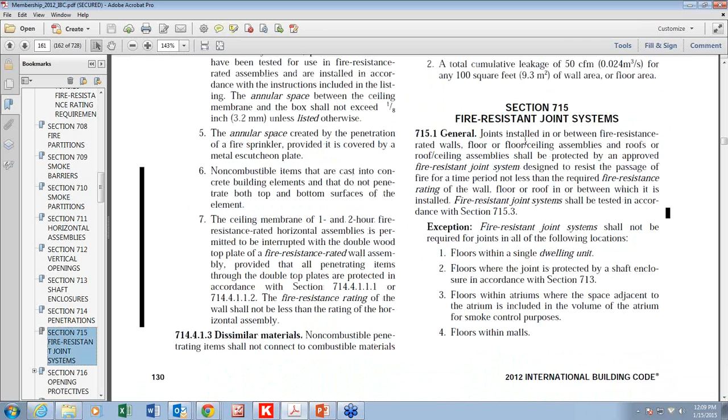In general, joints installed in or between, and I'm going to make this bigger so we can see it, in or between fire resistance rated floors, floor ceiling assemblies, and roofs or roof ceiling assemblies shall be protected with an approved system. Take a look at this. Nowhere in this charging language does it say the size of the joint. The concept in fire resistance rated construction is that the continuity has to be there.

The question comes in when somebody saw cuts in a concrete floor or wall, and that saw cut doesn't continuously go through. Does that need a fire stop? Well, looking at the intent of the code, has the continuity of the fire resistance been breached? I don't think so. I'd let the AHJ answer that question. I'd let the designer answer that question. Personally, I'd say it has not been breached if the continuity has not been breached.

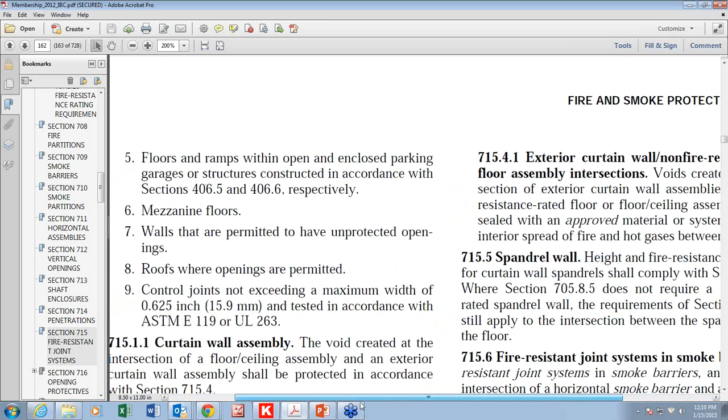In 715, there's also a section that talks about control joints, the exceptions. And this is where you would see whether or not a joint has to be protected. So coming over to joints, here it is. Control joints not exceeding a maximum width of 0.625 inch. The way I interpret control joints is that they're not continuous through the wall or floor. The way others determine them is another story.

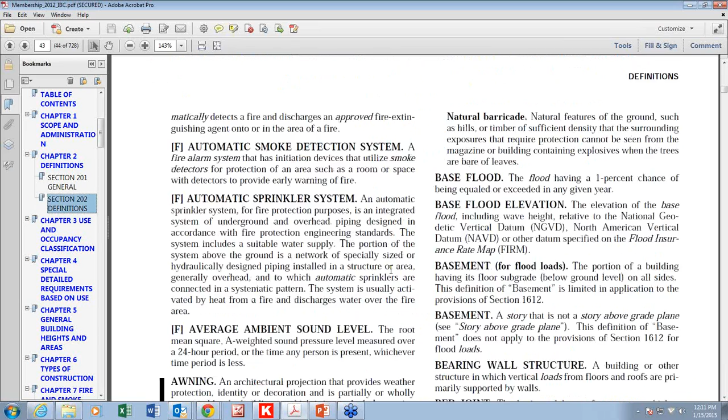Let's go to Chapter 2 and see what Chapter 2 says about control joints. Actually, I'm going to start with Chapter 7's definitions. I don't see any definition for a control joint in Chapter 7. Now let's go to Chapter 2 of the International Building Code, scrolling down and looking for control joint. Let's see, I don't see a definition yet. Let's take a look.

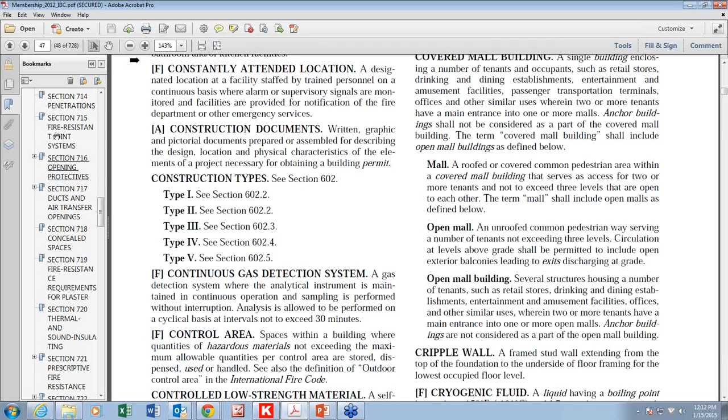Control area. Nope, no definition for control joint. Most of the time a control joint is a saw cut that doesn't go continuously through the floor or the wall. And that's probably why in the building code in Section 715 it asks for the control joint to pass this test, and that test is the ASTM E119 UL263 test.

Back to joints. Let's go back to the charging language for joints. Okay. So let me get back to 715. Sorry about the movement there. Looks like my code, there it goes.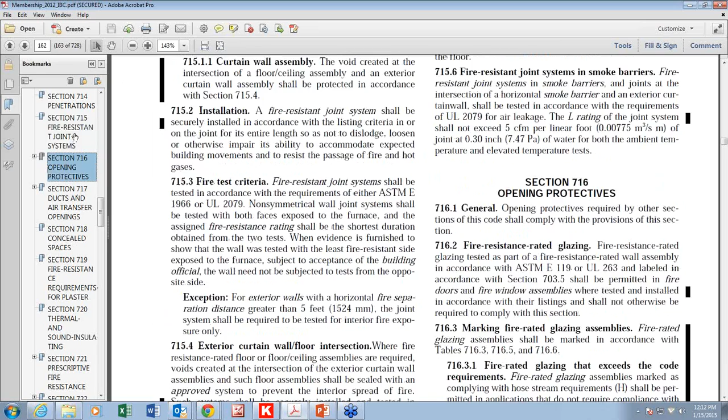Okay, 715, joint systems. Control joints not exceeding a maximum width of 0.625 and tested in accordance with E119 and UL263. So if there's a control joint and someone says, I don't have to fire stop it because it meets this exception, that company has to now show a tested system to UL263 or ASTM E119 that shows that that 0.625-inch joint passes that test. So the exception is very clear that it can be done.

So again, watch out for definitions. Watch out for the intent of the code, because the intent of the code asks for continuity of the fire resistance. Great question. Thank you.

I'm going to look for a couple of more questions here. Let's see, where are the rest of them?

At a recent seminar I was speaking at, this is from somebody else, I was informed by a building official that they have the right to require special inspections on all fire stopping regardless of building type on the following section. Special cases, 1705.1, limited to the following examples, et cetera. And the question is, materials and systems required to be installed in accordance with manufacturer's additional instructions that prescribe requirements not contained in the code or in the standard referenced, all fire stop systems. I'm not sure I understand the question, but here's the program.

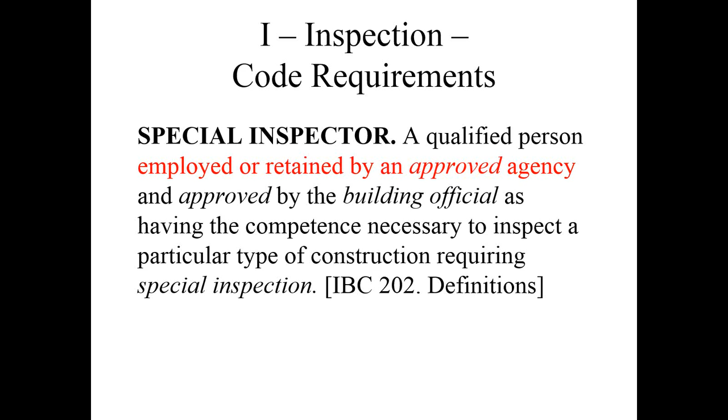The approved agency can be the IAS AC 291 accredited special inspection agency. That special inspection agency gets accredited by International Accreditation Services to IAS AC 291. IAS AC 291 is the accreditation criteria for special inspection agencies. And if you remember the types of things that a management system has to have for the contractor program, you'll see that similar types of things are needed in the inspection agency program.

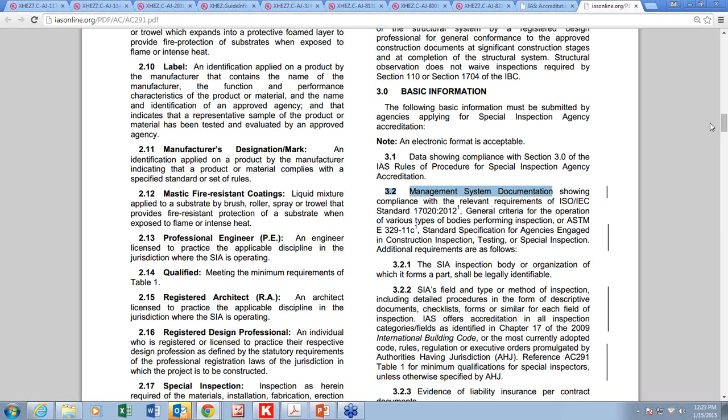The special inspection agency has to have a management system. That management system can be managed by one person who's the special inspector. They just have to have policies and procedures they follow to get the quality done the way it was supposed to take place. Good question. How long does it take? It can take a company anywhere from a month and a half to 2.5 years to get accredited. It all depends on how good they are at running their management system.

And FCIA in the members only section has a management system template built for those special inspection agencies and the approved contractors that'll help them get through that along the way. So great question. Really appreciate you asking that.

Again, back up to the approvals needed by the AHJ. This is something that gets missed in the industry a lot, this concept of approved agency and special inspector. Many AHJs think all they've got to do is approve the special inspector. They need two approvals, but they can approve both at the same time and say it. That's what the code is asking for.

Second, I have contractors who are FCIA members. Really glad to hear that. This is an AHJ asking, and not FM or UL approved. As an AHJ, we ask the contractor to submit a quality assurance manual or a management system manual in order to qualify them as a jurisdiction. What's our recommendation? Following a checklist to make sure they provide a good quality assurance program without the benefit of them being covered on the management system program.

Well, as an association, we don't mandate that the FCIA member has to be FM approved or UL qualified. They can have their own management system, and many of them do. They can use the FCIA template. The critical part is the audit by a third-party independent entity, FM or UL, that says that the company actually follows the procedures that they talk about in their management system manual. It's not that expensive to get done, and there are lots of these contractors all over the place.

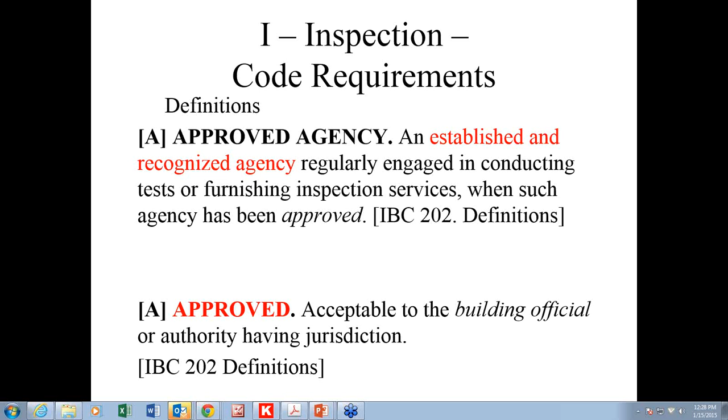They try their heart out, but they're influenced by lots of different things. We think that it's important to have, based on the fire code, and that fire code is very clear. And maybe what needs to happen is the building owner manager needs to wake up and see that there's a law that says that if they don't visually inspect annually and repair, restore, replace when damaged or breached, these two things, this is immediate stuff for their continuous fire resistance rated construction, cause property damage, they're going to have some very big legal issues to deal with.

Next question, does the UL stamp in plastic electrical boxes mean it doesn't need to be addressed even if it breaks the code for membrane penetrations? Oh boy, good question. Back to the continuity of fire resistance. The building code says where electrical boxes need to be treated by fire resistive materials. There's a classification for it in the UL directory. There's a code requirement for it that talks about the separation of those boxes in membranes of the fire resistance rated assembly. That's where we need to pay attention to that.

Good question. Next question is, if there's a difficulty in finding a third party to inspect, can the AHJ do the fire stopping inspections instead of a special inspection agency? Absolutely is the answer to that question. The AHJ can serve as a special inspector. Financing it would be another issue, though. How does that get paid for? Why would they want to do that would be the question on two fronts.

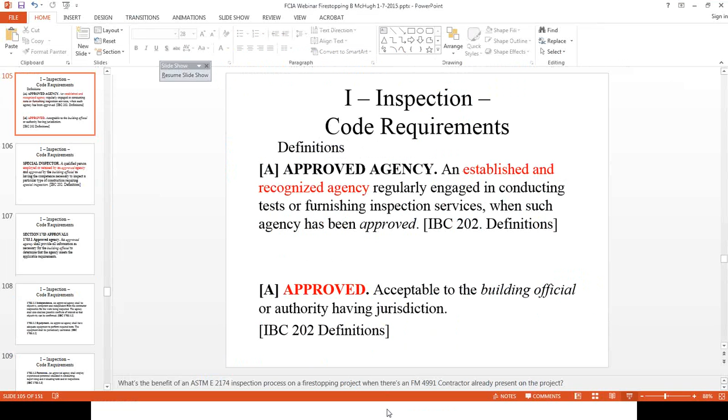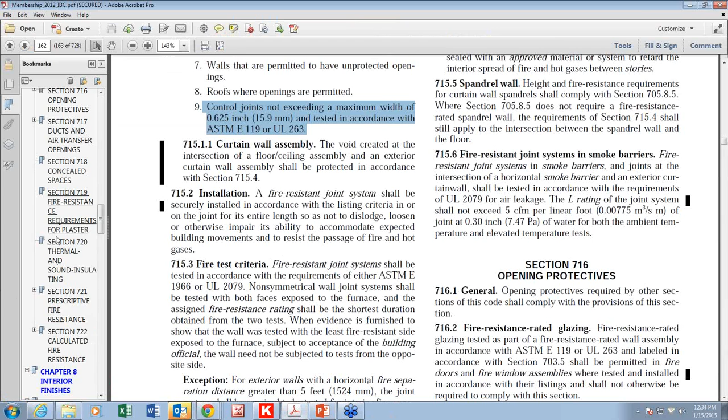Good question. Next question is, are floor T ratings a code requirement? I'm seeing Firestop specifications require floor T ratings, but most do not. Great question. Let's go back over to the International Building Code, Chapter 7. In 714 penetrations, the code says F and T rating, and it'll say that the T rating's got to be there except for a couple of areas. Let's see where that T rating is. T rating, temperature rating. Let's see.

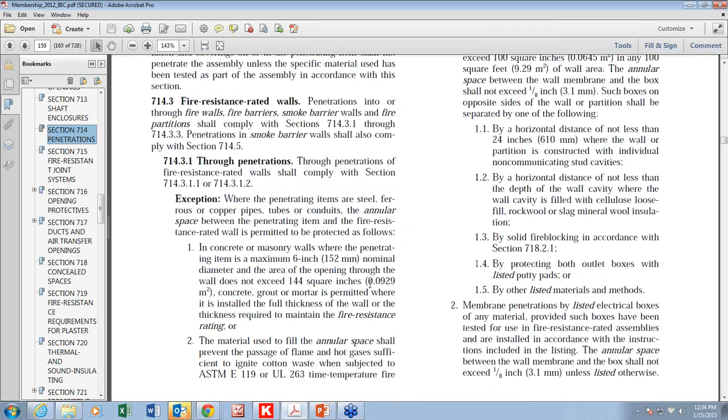Rather than scroll around, I'll instead give you the exceptions. There's only one exception where the T rating is not required. That exception is the same exception that you would find for fire stopping, and that's where concrete, grout, or mortar is used as a fire resistance rated assembly, tested as an assembly, or equivalent thickness is provided by the code. And the equivalent thicknesses you would find over here in section 722, the calculated fire resistance.

So there's two ways to prove that the generic materials will work. One is tested to ASTM E119 or UL 263, and no flame passes through. And the second one is using this prescriptive method that says maximum 6-inch nominal diameter penetrating item, opening area of 144 square inches, concrete, grout, and mortar permitted, full thickness of the wall, or the thickness required to maintain the fire resistance rating. The thickness required to maintain the fire resistance rating is down here in the equivalent thickness.

This equivalent thickness, cast in place precast concrete walls, et cetera, 3.5 inches for an hour, 5 inches for 2 hours, depending on the aggregate. Lightweight aggregate gets you 3.6 inches for a 2-hour rated assembly. That's how you find that kind of stuff. Great question. Thank you very much.

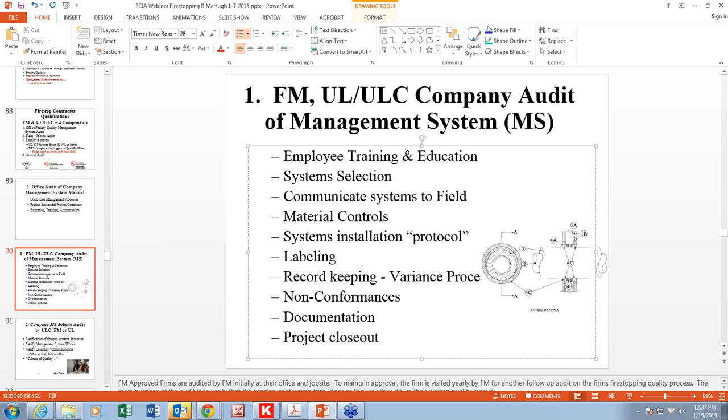Let's see. Next questions. Someone's looking at the FCIA website. Can you take the UL Firestop exam somewhere else other than an FCIA, such as proctored sites? Yes, there are 3 other sites currently. The 3 other sites are the UL locations. Underwriters Laboratories will be February 12th up in Toronto. We'll be in Melville, New York in March. We'll be in Chicago sometime this summer.

And then we'll be at all of the FCIA symposiums. We'll do one in Ottawa, Canada. We'll do one in Abu Dhabi. Do one in Doha, Abu Dhabi in the UAE, Doha in Qatar. So off we go. Getting back to the questions, I think that covers the questions that were there.

Let me get back to the people that were asking questions and open up the microphone. Sonia Antunovic-Kursik. Sonia, do you have a question also? Okay. Next person with a question with a hand up, Todd Gilbert. Todd, do you have a question? Okay, nothing from Todd. Next is from Felix Candejas. Felix, do you have a question? Hello, how you doing? Doing okay, Felix.

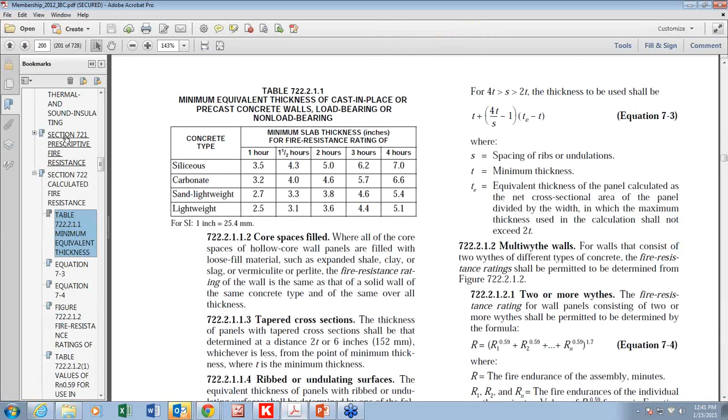So here's the answer to the roof ceiling fire-resistant joint system. The code is, it depends on how clear and how it's interpreted. Let's go back to 715 joints. 715 joints has sections that cover fire resistance rated construction. In the general section, it talks about in or between fire resistance rated walls, floors, floor ceiling assemblies, and roofs, or roof ceiling assemblies. It's got this fire resistance rated in between all of it.

Shall be protected for the period, blah, blah, blah. And then it talks about how they should be tested. There's several exceptions: floors, atriums, floors within malls, floors and ramps in open parking garages, mezzanines, walls that are permitted to have openings, roofs where openings are permitted, control joints.

There's one other section, though, that talks about a similar area that you're talking about, the curtain wall assembly. The curtain wall assembly has a fire-rated floor hitting a non-fire-rated curtain wall. And the code says that the fire-rated floor has to be continuous, outside wall to outside wall, floor ceiling assembly to floor ceiling assembly.

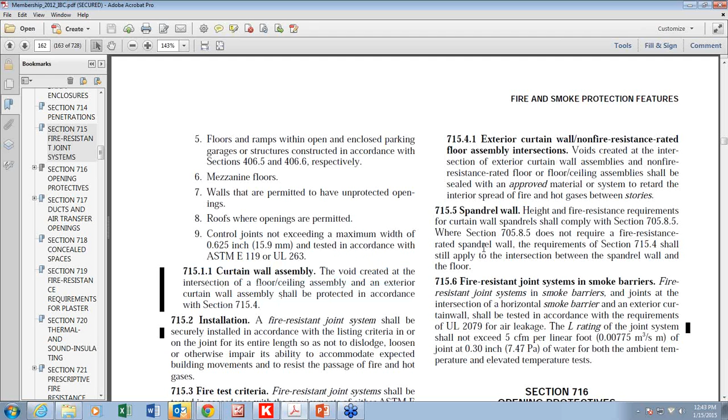If you use that logic, even though the code doesn't specifically say non-rated roof assembly, it would be safe to say, at least in my opinion, I'd leave it up to each AHJ, because each AHJ is going to make their own decision about this particular area. If the continuity of the wall has to be to the assembly where it stops, then it would have to be fire stopped to extend the rating of that fire resistance rated wall up to that non-rated assembly.

There is a test standard at ASTM. ASTM, I believe it's either E2307 or 2837, I don't remember the number, that shows testing of fire-rated walls to a non-rated roof assembly. There's not many tested systems, but there are some. This occurs at smoke barriers a lot, especially at single-story medical office buildings and healthcare facilities.

Smoke barriers exist, 1-hour fire-rated assemblies, and then the smoke barrier, if you go back to smoke barrier and look at the definition of what it's supposed to be in the general section, here it is under continuity. Smoke barrier shall form an effective membrane continuous from outside wall to outside wall from top of the foundation. Look at all the continuity here.

This is telling you that if it's a smoke barrier and you're hitting a non-rated assembly, extend the wall up to the non-rated assembly. Put a fire stop in to do that. So in my opinion, use a fire stop system to do that because you're extending the fire rating of the wall.

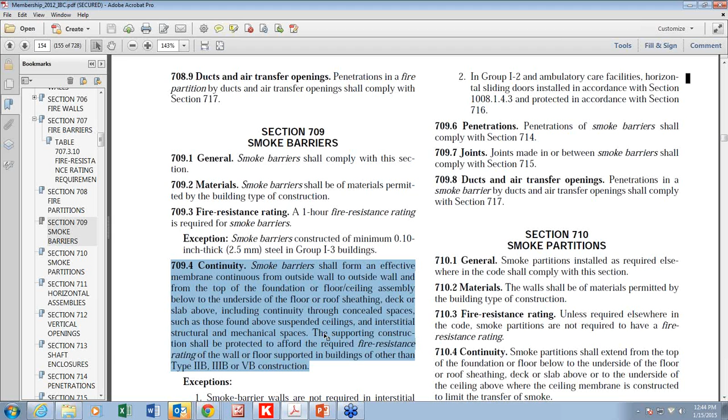Let's see what the continuity says about fire barriers too. Fire barriers probably has that exact same continuity requirement. Where the heck is it? Yep, continuity. Here we go, 707.5. Here it is again. Top of foundation of floor or wall assembly to the underside of the roof sheathing. So that tells you fire barrier, non-rated or rated, touching a non-rated or rated, fire stop.

My opinion, again, I'm not the AHJ. You got to talk to the AHJ in every community to know that. So don't rely on me and say, well, Bill said it's okay. This is really the AHJ's call.

And this is where the discussion is about sometimes clear and unclear code requirements, because it doesn't exactly point out, okay, if you have this, do that. Those that look at the code, though, say there's a continuity requirement and that fire rating's got to extend all the way up and all the way out. That's awesome. Thank you for the question.

Have you seen where a fire stop installer uses a through penetration system for a membrane penetration with the manufacturer letter included?

That's a great question, and thanks for asking it. There's currently a discussion about membrane penetrations and whether a through penetration can be used for a membrane penetration. The membrane penetration, think about the fire dynamics. The systems show a through penetration in, let's say, a fire-rated wall assembly.

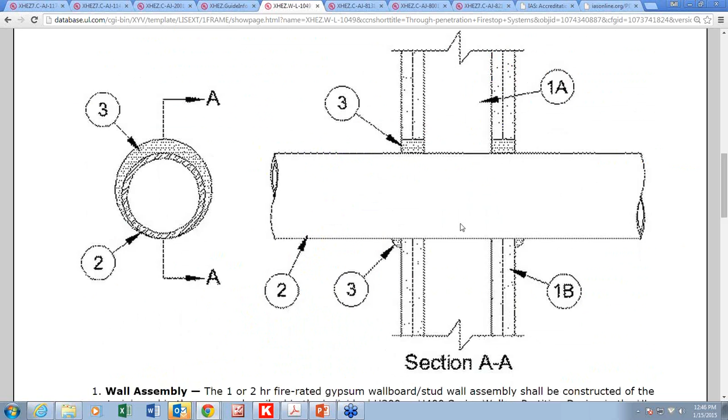In that wall assembly, we don't know if, and I'm going to go backwards and try to do a different system. Let's do a WL. There's WL. Let's do 1049. WL 1049. And let's take a look at it pictorially so you can see what the point is. Okay. 1049 is a metal pipe. This metal pipe just went inside the wall, and now it takes a right-hand turn and goes down the wall. That metal pipe is inside this wall membrane.

In order to get a 2-hour fire rating, you need both membranes, both of these fire-rated gypsum wall assemblies. This first wall membrane is a sacrificial lamb. It's gone at the end of 2 hours when the hose stream test hits it. I don't know what its thermal transmission rate is, nor the temperature inside this cavity after the end of the

fire test. If this metal pipe is turning down, and it's at 600 degrees, 1,000 degrees, it may drive the moisture out of the gypsum wall, or if it's a concrete block wall, the concrete block is also relying on the matrix of the moisture, cement, and aggregate matrix to maintain its fire rating. So as soon as this metal pipe turns down and goes into the wall assembly, it changes the fire dynamics

of that wall. So a manufacturer letter is great, but this is something that question should be asked. Was there a test that proved that the second membrane actually worked in the wall assembly or the floor assembly? Has it been tested to show that that didn't degrade the other side of the membrane? If yes, okay, let's go. Sounds great. Good question. Thank you very much.